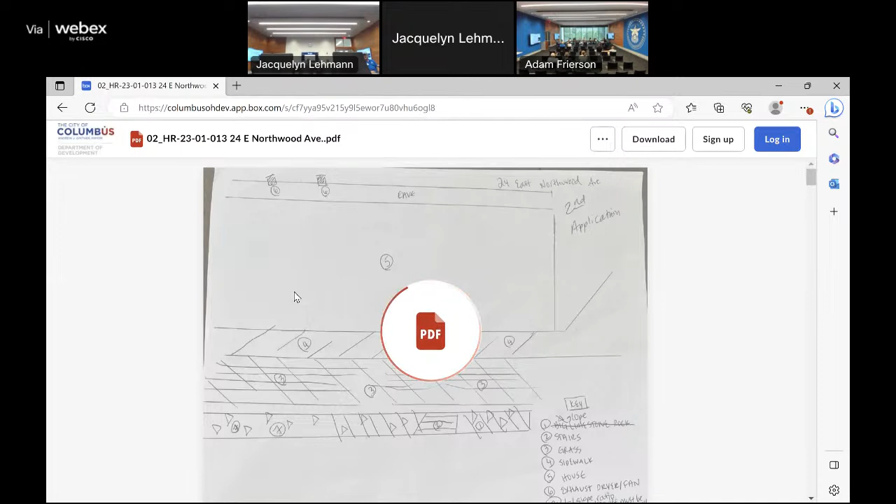Okay, so jumping in, the first application has been moved to staff approval at the business meeting. So we're going to go ahead to number two for the continued applications, and that is for 24 East Northwood Avenue. This application involves landscaping and exterior alterations, including modification of landscaping with new hardscape and removing of the retaining wall, as well as installation of venting through soffits.

And removing a portion of large rocks and installation of perennials. That work has been completed. There's also a proposal to install a new retaining wall, and that is proposed, so that work has not been completed. The property received a code violation in August of 2022 regarding the change of the front yard area to hardscape, removal of retaining wall, and modification of the roof soffit with venting extruding from the soffit.

The application was continued at the January meeting, so the applicant had time to come back with a revised proposal and drawing of proposed plantings. The applicant has added plantings and removed some of the rocks hardscape. At the July 6th business meeting, the commissioners noted that the application is moving in the right direction, but want to make sure there's enough plantings.

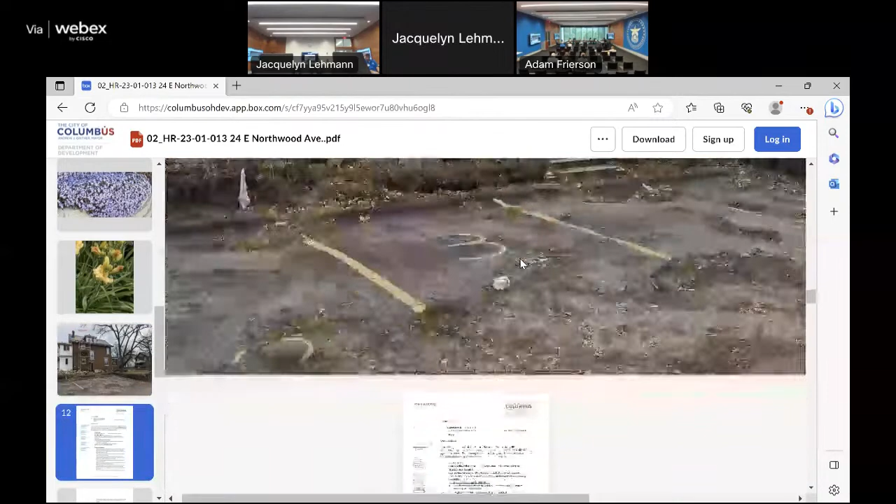The commissioners asked what would be put on top of the landscaping fabric. The commission asked if staff could include a before photo side by side with the current photo of the front lawn area to better show the difference. The commissioners noted the storage container should be removed, and the applicant has since confirmed that the storage container has been removed from the property.

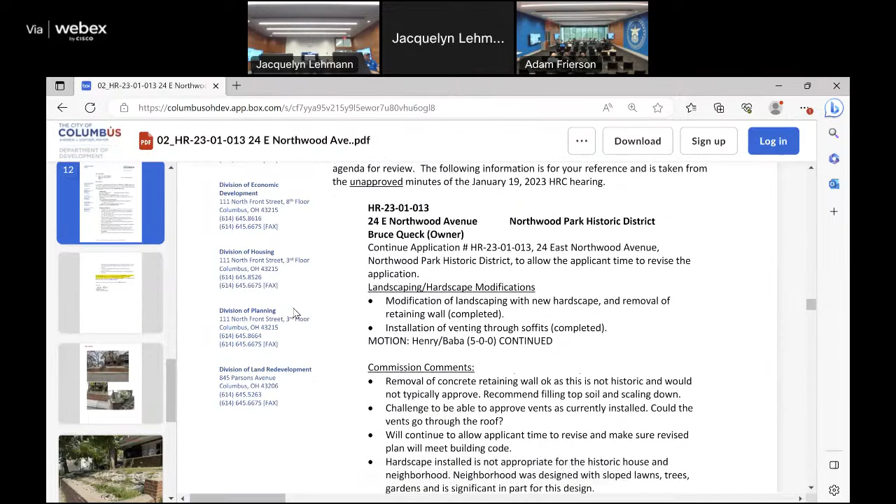The commissioners noted that new retaining walls are not typically approved, as they want to avoid setting precedent. The commission did have additional questions about the proposed retaining wall based on the sketches. They did not see details, or wanted to see details, showing long-term viability, such as for water or drainage, or weeps, and were not sure what the foundation materials were that were being proposed. The commission noted that the proposed materials appeared to contrast from the brick retaining wall currently present on the property.

And the applicant noted that on the side of the property, there was sort of that round rock, and that I believe is the cue that they were taking from.

And then the commissioners asked that the proposed retaining wall be indicated on the site plan to show the location.

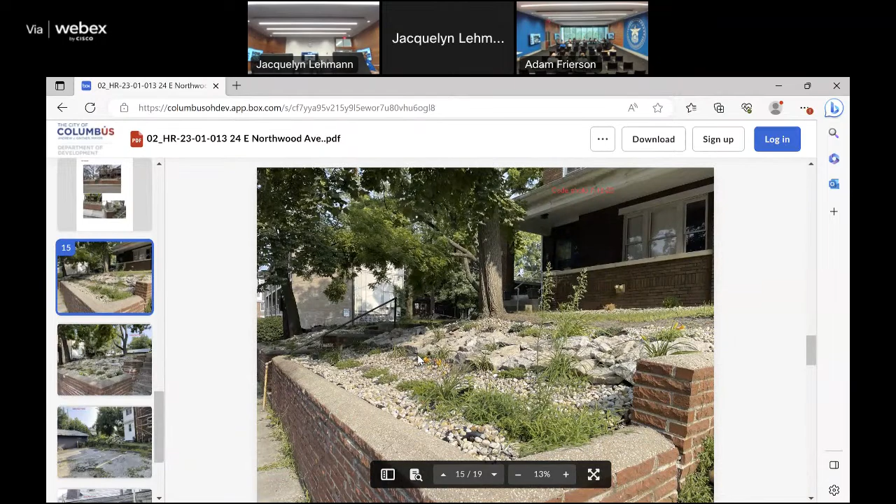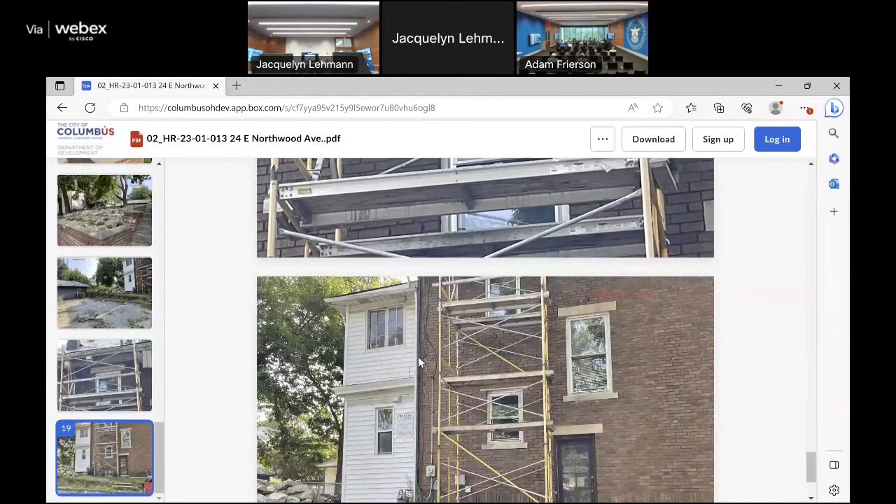So staff recommends increasing the amount of plantings and reducing the hardscape to more closely match the historic landscape of the home and the neighborhood, to meet the guidelines and code, and to confirm that with an updated landscape plan. So one suggestion would be adding plantings of various heights, which may help achieve that greenscape.

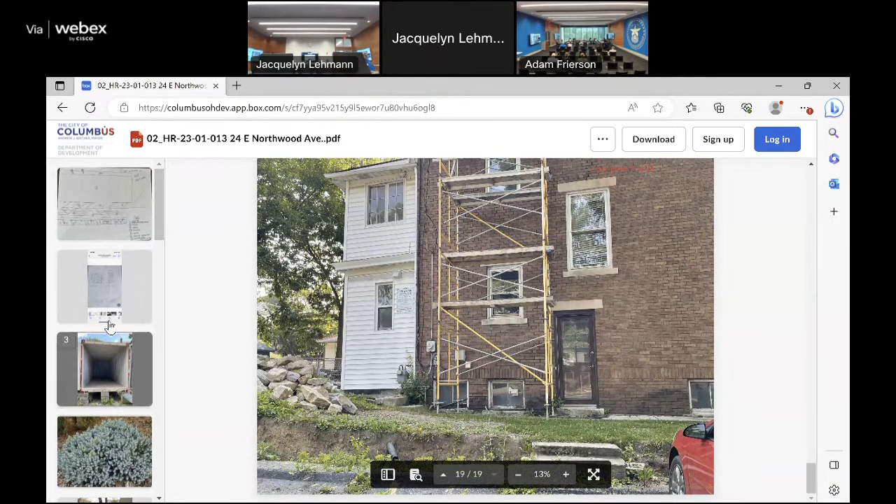The applicant notes that additional work has taken place for the venting and soffit area, so staff recommends the applicant submit current photos of the venting and soffit area to clarify the additional work that has taken place. And code enforcement has provided some updated photos from this week, just recently added to the application to give an idea of the current context.

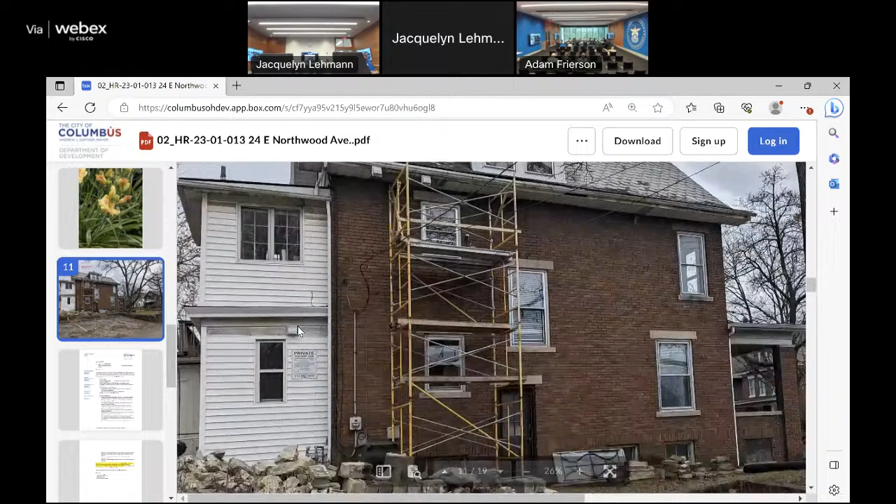Staff recommends continuing application HR-23-01-013 at 24 East Northwood Avenue to allow the applicant time to revise the application to meet city code and the Columbus Register of Historic Property architectural guidelines. The basis for that staff recommendation is city code 3116.13, standards for site improvements, specifically letter A, and the Columbus Register of Historic Properties for historical plants and landscaping on page 83.

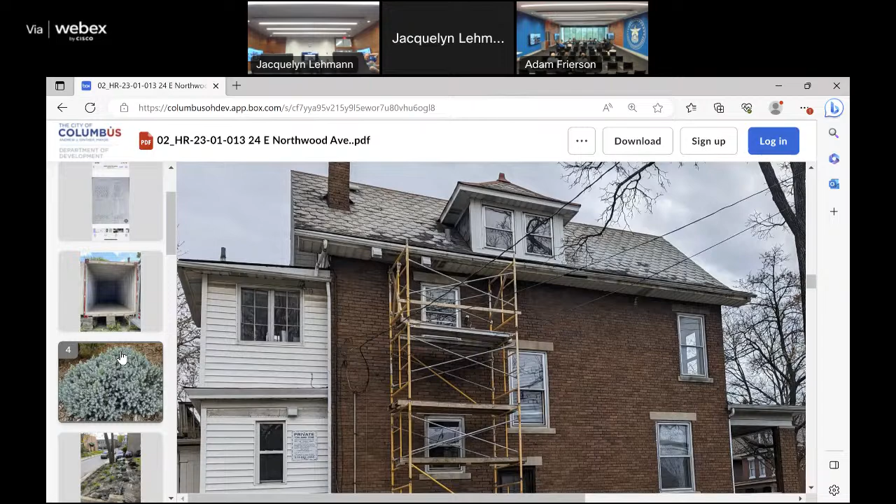We could table it if there's a possibility we come back to it if we don't have the applicant here, if that's okay with you. Yeah, why don't we do that? We'll move on to the next application, just in case they come in. Maybe that'll give us some insight.

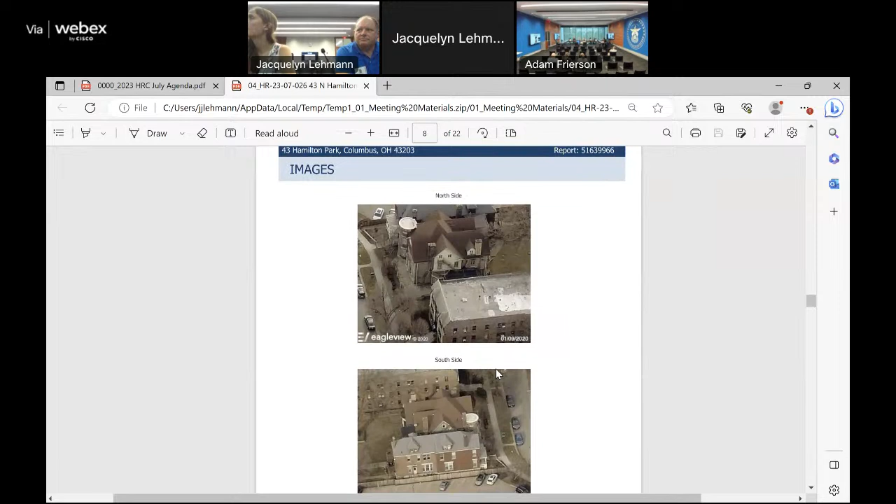So in response to commission feedback, the applicant notes that their primary reason for selecting the ultimate shingle is for increased durability, and confirms they will bring the shingle samples to the July meeting.

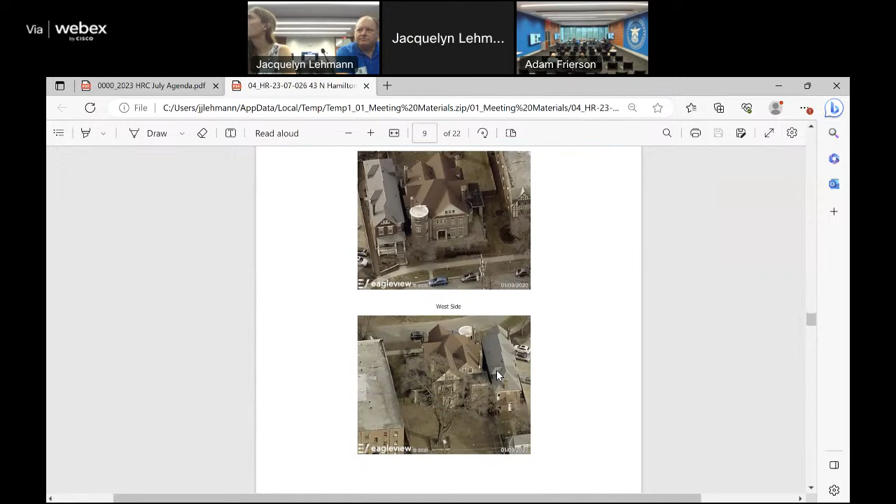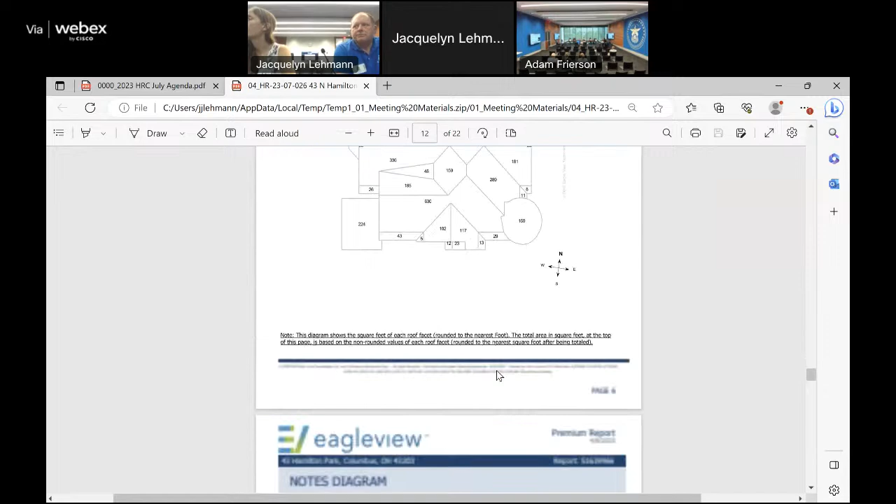Sanborn mapping from 1901 to 1961, as well as the Ohio Historic Inventory Form from the 70s, confirm that the roofing material is historically slate. That's just something staff wanted to check, since the asphalt shingles currently on the home happen to be a red shingle, confirming the roof was slate and not tile. So the proposed shingles should avoid varying sizes, but rather have uniform sizes to match the appearance of slate.

The approved shingles list itself that we have today was established based on the historic use of roofing materials in Columbus, specifically the types, colors, and shapes of slate. While no asphalt shingle exactly mimics that size, color, and texture of slate, those on the current list are the closest we have found.

So, following the city code standards for alteration, repair or replacement of missing architectural features shall be based on accurate duplications of features substantiated by historic, physical, and pictorial evidence, rather than on conjectural designs or the availability of different architectural elements from other structures.

So the question before us today is, does the proposed shingle selection match the appearance of slate similar to or better than the shingles on the approved list? If found to match, staff recommends that the proposed shingle be approved as a test case. If the shingle does not match the appearance of slate, staff recommends choosing a shingle from the approved shingles list per the standards of alteration.

So the basis for the staff recommendation are the standards for alteration, specifically numbers 6, 11, and 12, as well as the HRC guidelines for roofing materials.

Were the samples part of what you're considering using on the roofing material that you're discussing today? One quick thing, if you don't mind: you guys have put down that the shingle we are proposing is a 3-tab, and it's actually not. It's a dimensional shingle, and I don't know how that ended up being listed that way.

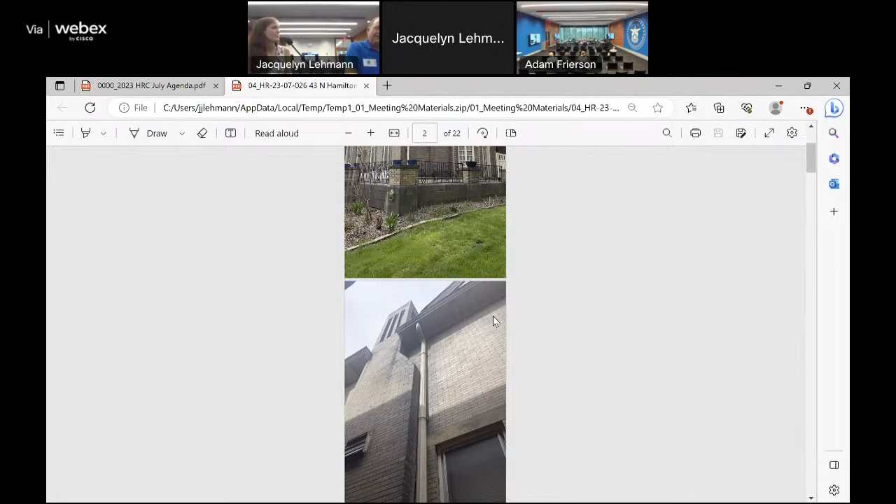Oh yeah, if it helps, I guess. So currently, the home has a castle-like feature on the left side of the building, which they actually have a person looking into creating plans to do the original cone. Wow, and so that would also be wrapped with the shingles.

Should have like a conical roof on it. Yeah, that's the way it was originally, I think. Yeah, so we have an original photo of the house back from -- I think I saw it. Okay, great, 1912. Okay, and that will have to be approved separately, right? Yeah, yes, absolutely, yes.

Yeah, so obviously you wouldn't do the same shingles on there. Yes, they have wonderful plans. Oh, there it is, yeah, and then it's the last one. Oh, that looks nice. Yeah, great.

Okay, so within the next couple of days, usually we say 3 to 5 business days, we'll get you the COA for the roofing and you're good to go.

Okay, is there anyone here by chance from... 24 East Northwood? Anybody? Is that where we started? Yes, I keep an eye on that, okay. Kimball. HR-23-07-027, 792 Kimball Place. Anybody here for Kimball? Please come on.

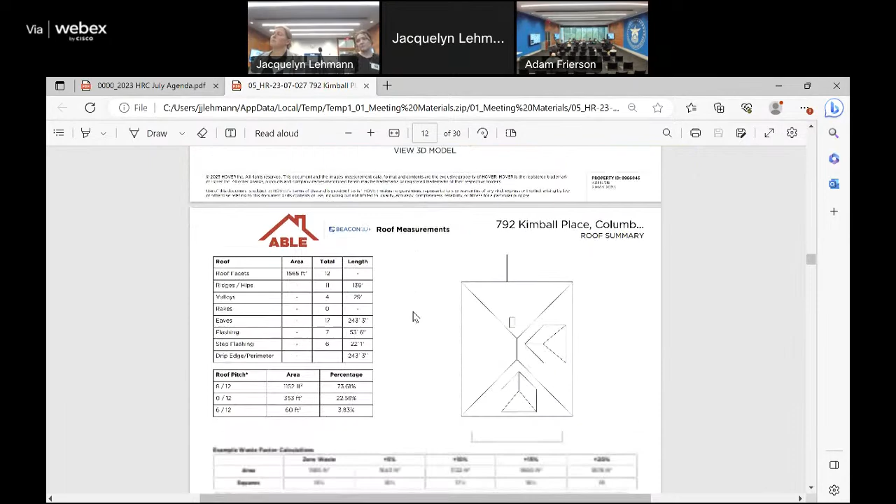For this application, the question before the commission is whether sufficient documentation has been provided to determine if the slate roofing can no longer be repaired. HPO staff does not support the installation of hat vents, rather we recommend ridge or edge vents in lieu of hat vents.

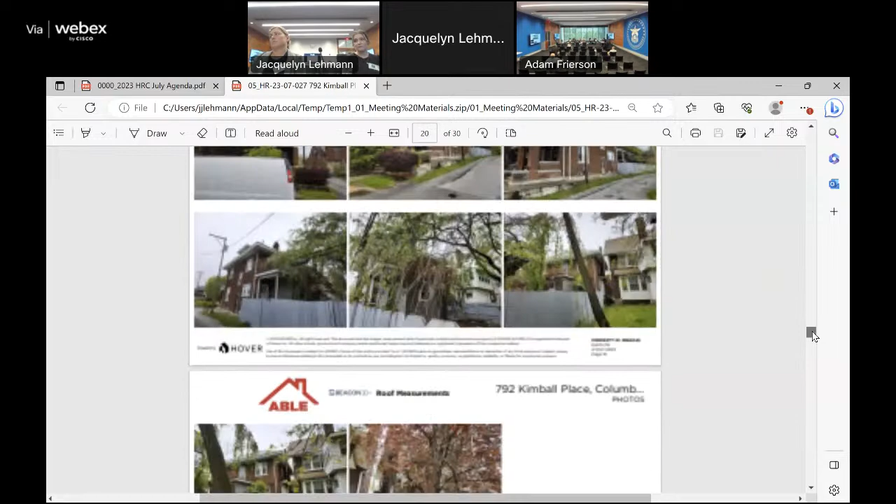Staff recommends approval of application HR-2307027 at 792 Kimball Place with the following stipulations: that clear photos and documentation is provided to confirm that the slate can no longer be repaired, and that appropriate venting is completed instead of hat vents.

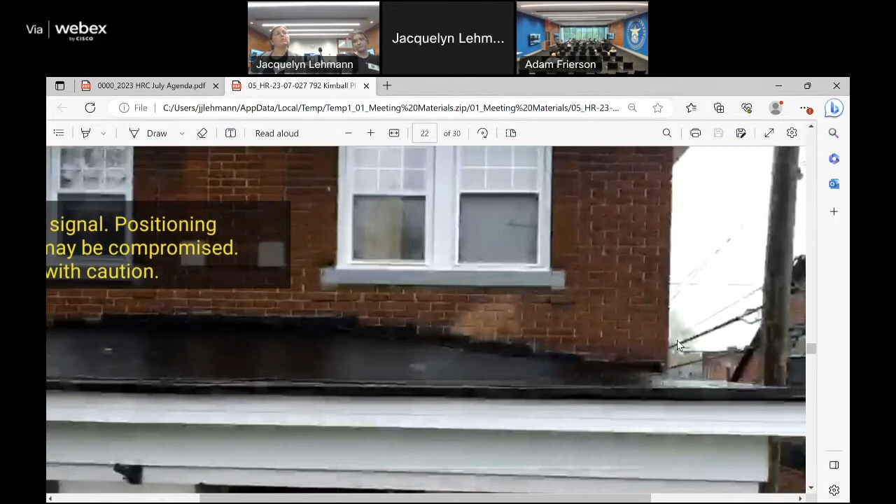The staff recommendation is based on the standards for alteration, city code 3116.11, specifically numbers 2, 5, and 6, as well as the HRC guidelines for roofing materials, which note, as an example of caption, that the new asphalt roof has a metal ridge roll vented along the ridge instead of using hat vents, and that the ridge vent material is barely visible and appears in the photo as a horizontal dark line or shadow beneath the ridge roll, as well as the amendments to the HRC guidelines, including slate roofs and for slate replacement.

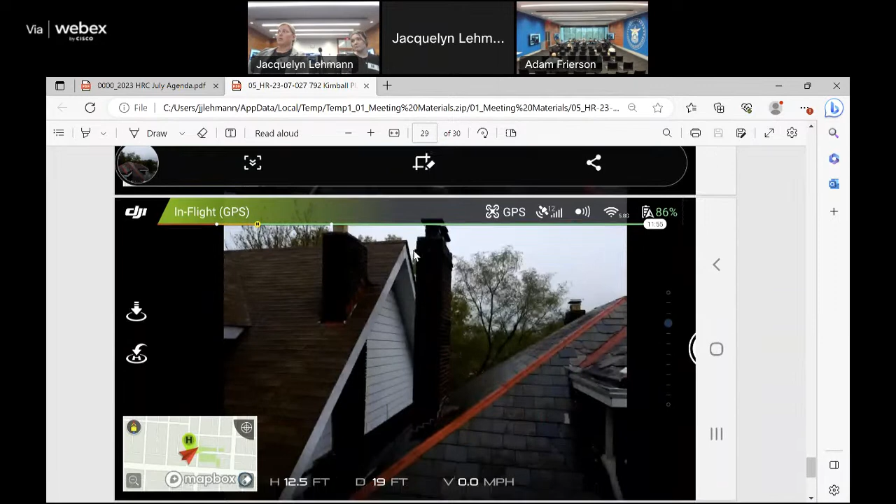I've got some documentation that I'd like to pass out, if that's okay. It's mostly the same pictures. I just thought it might be easier to see the damage if I circled it and pointed it out, as well as we can discuss the ventilation issues or concerns, I guess they should be.

Sure, okay. I labeled everything, so it should be in there. Thank you. Yeah, thanks, yeah.

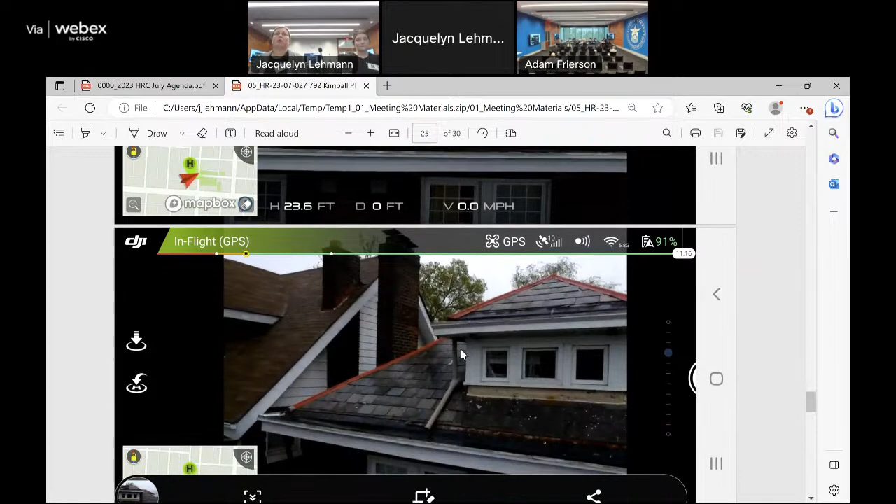Can you do spot repair - remove the damage and just put back the original material? My understanding is sometimes yes, sometimes no. Sometimes even getting on a roof that's over 100 years old will just damage it more. The Durable Slate company does repairs, but their opinion was that it was beyond its life and in need of replacement. I would just defer to that company - they're accredited with the Better Business Bureau, and I don't think they have an interest in being dishonest.

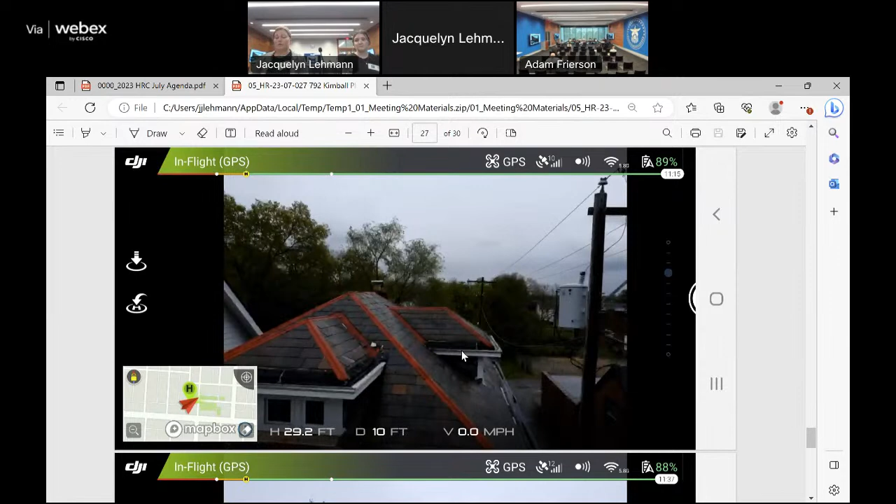Understood. Do we have documentation of their opinion, so we can reference that expert? They submitted it - yes, right at the front of the packet. Who sought out that information from the Durable Slate company? I had them come out initially to look at the roof.

It is an expert opinion, right? And I would imagine they'd provide clarity if they thought repair work was possible. I think if it was repairable, they would have probably liked to do that. Well, I'm sure they'd like my money either way.

Yeah, there's a lot there. Looks like they're not even all circular - that's a good point. It looks like about 40% damage in that shape. I hate losing the slate too.

Let's talk about the venting then. That seems kind of odd. With the amount of ridge vent on the roof, it wouldn't be adequate ventilation for her attic space. With the shingle we'd install, the 3-tab, Owens Corning recommends 37 linear feet of ridge ventilation. This house would only provide, what's my number, like 9 at the most. So we just didn't have another option besides the hat vents, in our professional opinion.

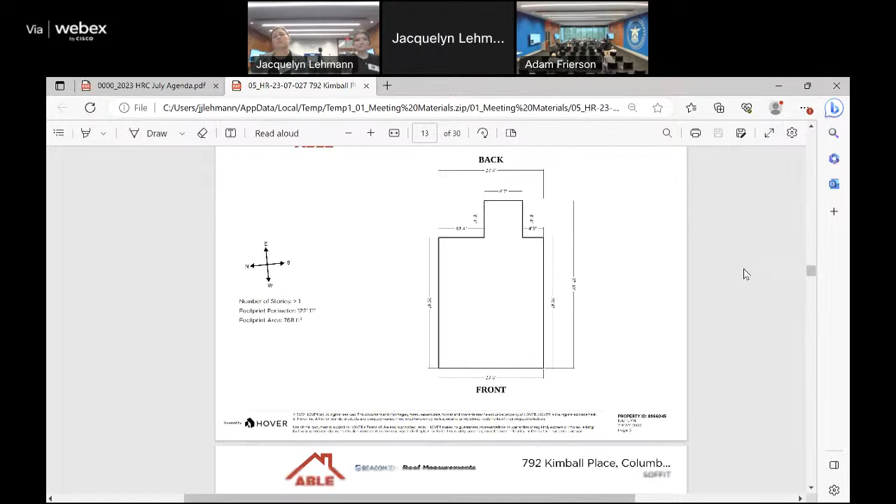How many units would you propose to satisfy your requirements? To satisfy the manufacturer's recommendations would be 9 hat vents. I believe the application needs updating - originally we thought it would only be 6. But we could alter it to add as much ridge vent as possible here, which would mean we'd only need 6 additional hat vents. I'd get the specifics on that as well.

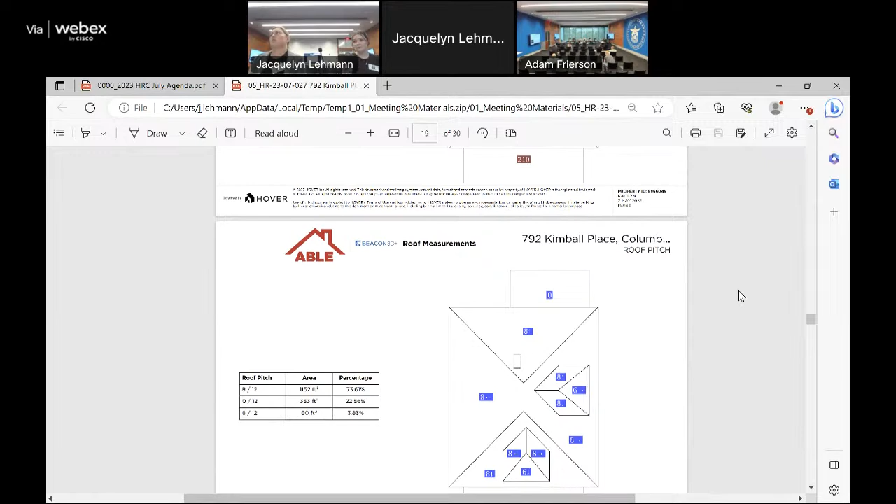So minimum of 6, maximum of 9. In the event that you were to put them, say for example, toward the rear and the adjoining property side, would that be doable, would it satisfy enough flow? Because you're talking exhaust now, especially if we do ridge vents on the dormers.

Yeah, it's not like we could put 9 hat vents on one facet of the roof and the attic be fine. It would have to be two, at least I would think, 3 and 3. Yeah.

Is there any other options, do you guys think? Well, right, I'm curious, this is a standard 4-square house. I mean, there has to be precedent, right? I'm sure this isn't the first hip roof 4-square house. I mean, I lived in one that was the exact footprint. Pretty common. Yeah, very common.

Just for what it's worth, the house that I lived in was slate and unfinished up there, and it just breathed right through. There was no need for venting, right, because it was breathing on its own. That's how it was designed.

So when you start to finish the interior, that's why I asked that question, you have a different requirement then. It poses all sorts of other challenges. I don't know if you're doing that work now or that's something that already exists, but the dew point becomes a big issue. That's challenging, converting these over.

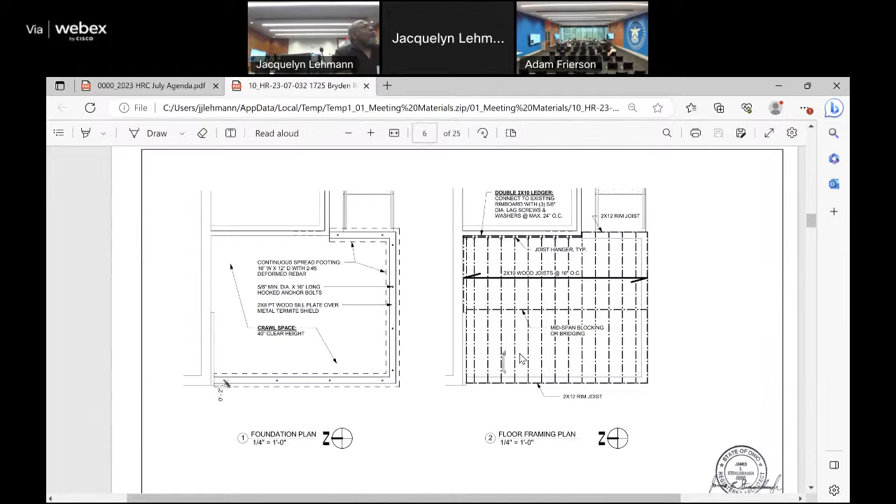For Hardie siding, for more clarification, the texture should be smooth, avoiding a full wood grain texture, which may be what the applicant is proposing, but staff want to make that clarification point. Staff also recommends the water table be masonry, to better match the masonry water table of the main house.

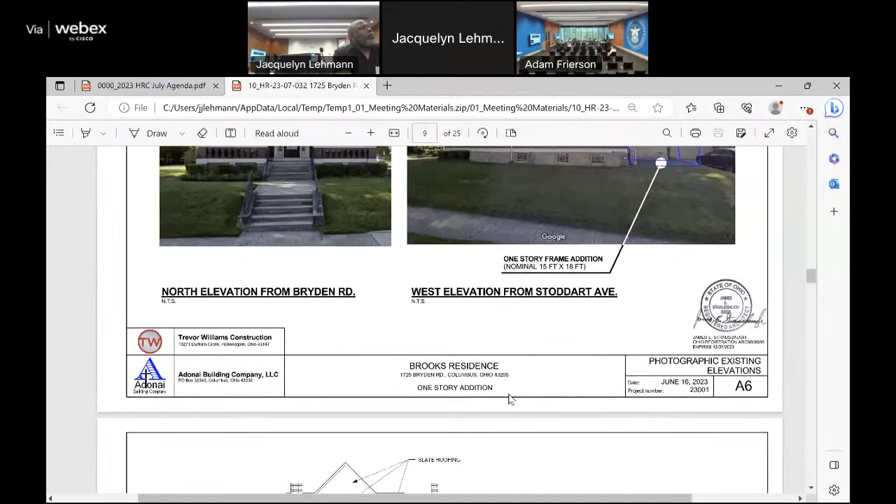At the July business meeting, the commissioners noted that although the variance had already been mistakenly approved without an HRC recommendation, the commission will need to provide a recommendation. The commissioners also noted that for a proposal of this scale, being a new addition, the application will need to be discussed at the regular hearing.

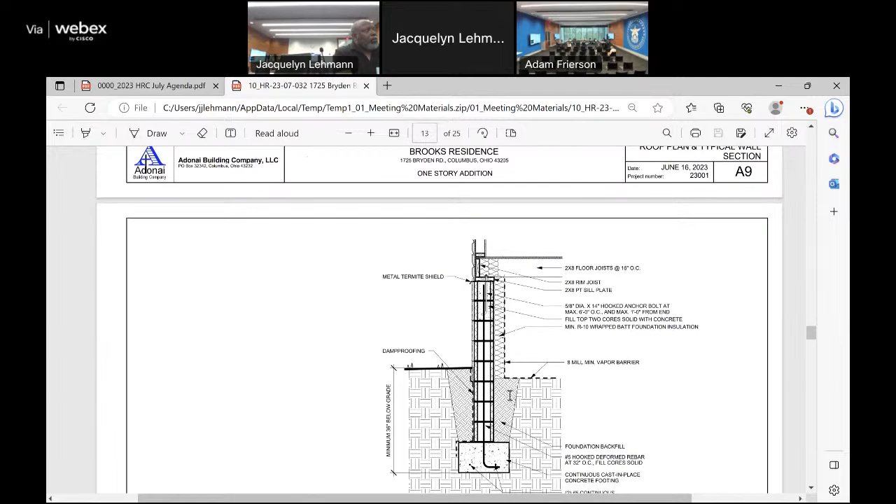The basis for the staff recommendation is the HRC guidelines, including for new construction, design considerations for foundation and siding, as well as the amendments to the HRC guidelines for required specifications for approval of artificial siding, and City Code 3116.12 standards for new construction generally, and City Code 3116.11 standards for alteration, specifically numbers 3, 10, 11, and 12.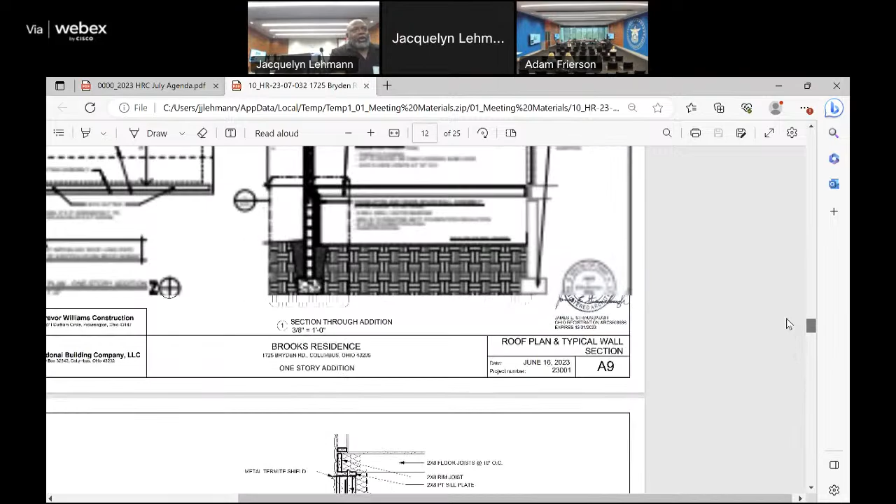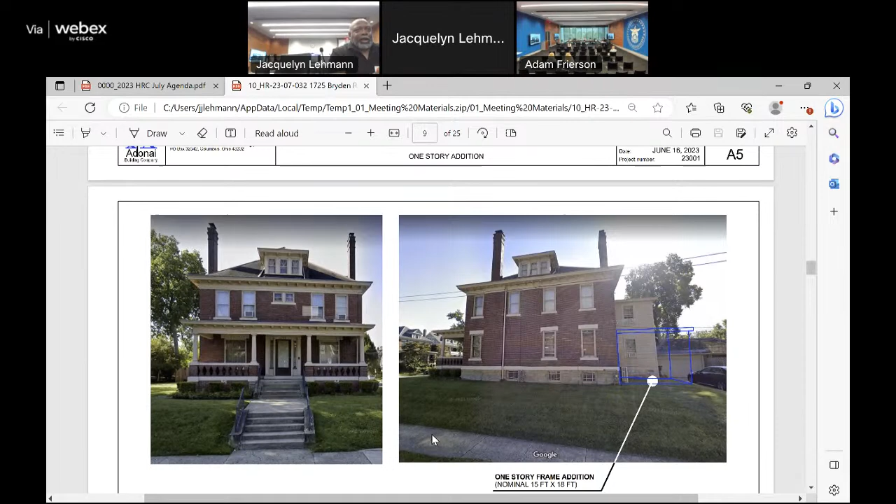Okay, what would you like to add, sir? In brief, this was a little bit confusing because we've already gone through a process of getting a zoning variance approved, about a month and a half to two months ago. I thought I was at this very meeting, and then when I went to the commission meeting a couple weeks ago, they brought up that I was here for a zoning variance, and I was confused. Evidently the left hand didn't know what the right hand was doing, but we have an official approval of a variance already.

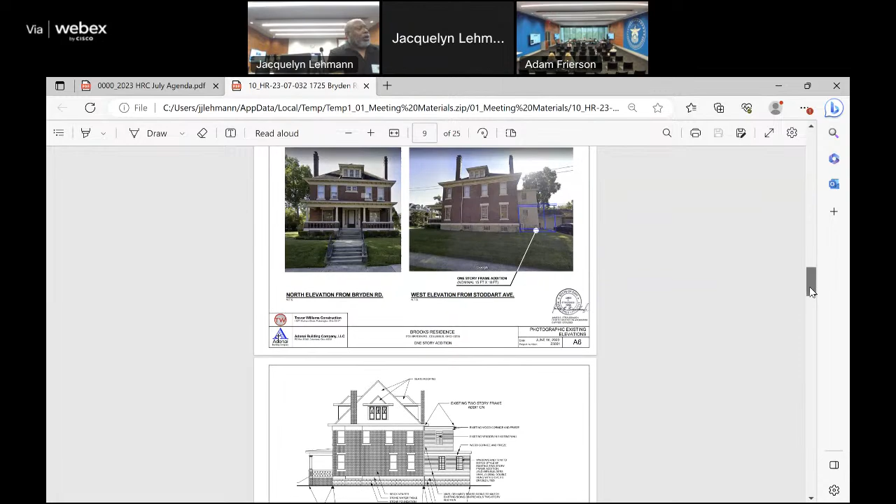Good, did you bring us a copy for the file? I didn't bring a copy because it's already been submitted. I didn't know that. Yeah, that's not going to be a problem, we'll figure that out. I just didn't know if you had it handy. I probably have it in my folder here. Okay, keep going. Yeah, I didn't know that was something you were even asking for.

I do. So we submitted for a building permit, and it's on hold until we got a letter from the HRC, from what I was to understand. I'm not an architect, but I've been working with my architect. I am the person on record dealing with this whole project. I'm a contractor.

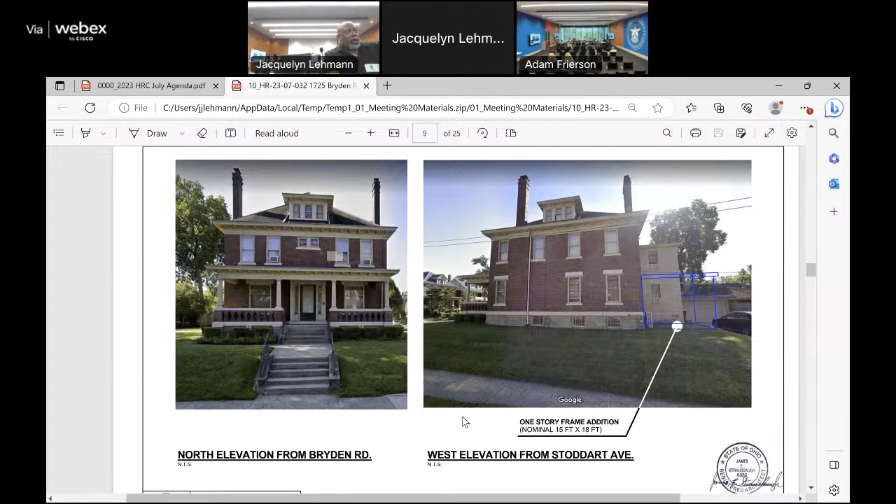But from what my understanding is, really the only thing you guys were concerned with mostly was the windows, and I guess the siding too, but we were matching the existing siding, and for the windows, we were using a window from the actual approved list.

So we have maybe 3 windows that are in question, just the 1-story addition in that rear corner. The staff noted that the window listed on the application isn't correct. It appears the architect made a correction with a letter but didn't change it on the drawings. You're okay with that? Yeah, I can make sure that happens.

And you're okay doing the foundation in masonry as recommended, to the water table? Yes, absolutely. So I think we're ready to go. If we approve it as submitted, that would also give him the recommendation for the variance, and even though he's already got it, he'll just check that box off. That way you won't run into problems later where somebody says you never got that, because you'll have it. They mentioned in the last meeting that it would be done.

If I could clarify, is the 'as submitted' version with the right windows from the approved list, or are there stipulations? Has the application been updated with the windows and everything? We just need the drawings to be updated. Like the gentleman mentions, there's a letter stating they'll be using a window from the approved windows list, and they specify which window — the drawings just need to match that statement.

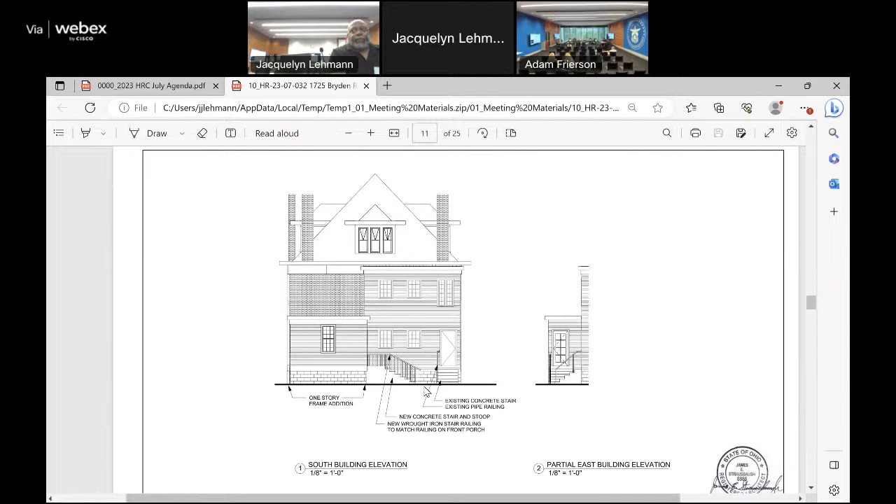Okay, so we could just move to staff approval. If the applicant is okay with the siding texture being smooth and the water table being masonry, that should also be reflected in the drawings. Would it be better to move this to staff approval, or should we make a motion? Since they're already at the hearing, I think we could approve it with the condition that materials be submitted to staff.

For case HR 2307-032, 1725 Bryden Road, I make a motion to approve the case and provide the recommendation, with the stipulation that the staff's mentioned items be reflected in a fresh set of drawings and application documents submitted to staff. I'll second it. Any further discussion?

If you get a list of the details, I'm sure we can put that in for you — probably in writing, about 48 hours from now. I know how it goes. Okay, but you're okay with all that? Yeah, I'm fine with that.

How soon do I get the actual letters? You can provide the updated drawings anytime, but if we don't get them before we send a letter out, we'll typically send a letter within 3 to 5 business days confirming it was approved. Final materials will still need to be submitted for the certificate of appropriateness, and once we get those, we'll issue that certificate and send it by email.

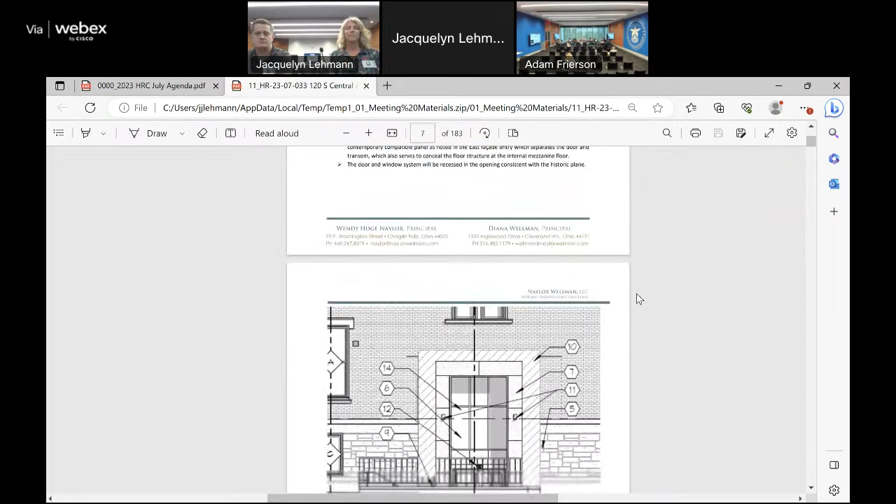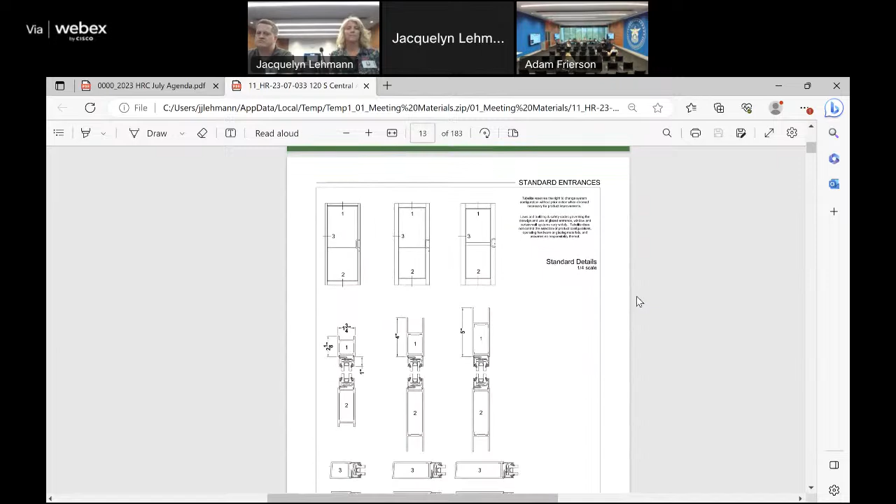For 120 South Central Avenue, the proposal is for demolition of a 1955 single-story addition, as well as exterior alterations, including installation of a new door surround with a 3-panel cement board, blond brick, limestone, and aluminum storefront, installation of a concrete ramp and retaining wall at the east elevation, replacing the existing multi-light vinyl windows with the Quaker H650 series window from the approved windows list to match, replacement of all doors with new aluminum doors, replacement of the roofing including the asphalt shingles and flat roofing with EPDM roofing in white, replacing the gutters and downspouts to match existing with the finish to match the trim color, repointing and masonry cleaning, limited masonry replacement and patching, installation of light fixtures and security cameras via mortar joints, and repainting the cornice.

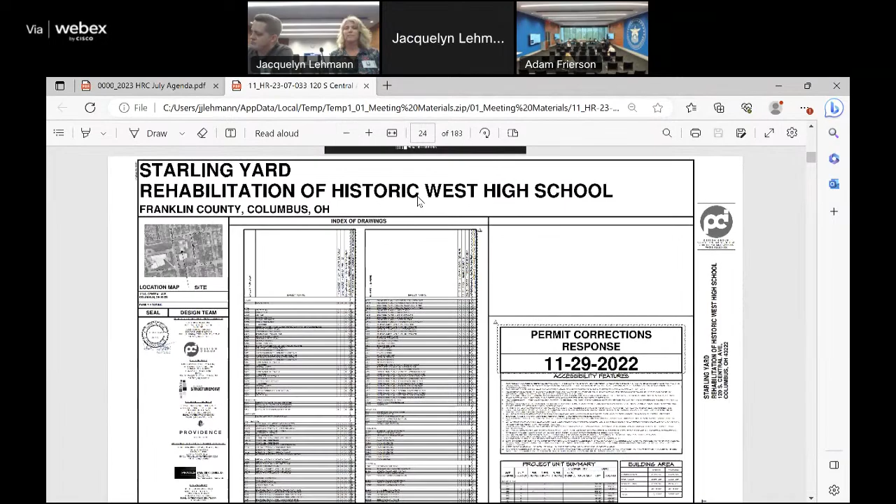At the July business meeting, the commissioners noted that a complete application has been submitted, and due to the scale of the proposal, it will need to be reviewed at the full hearing meeting. In response to previous commission feedback from when the application was withdrawn, the applicant has submitted updated materials, including product spec information and an example image of the proposed aluminum doors, and noted that the new windows will be multi-light. So the questions before the commission today are: are the proposed aluminum doors appropriate? Are the proposed ADA ramp designs for the east and south elevations appropriate? And does the commission consider the 1950s addition to be contributing, and is demolition of that portion appropriate?

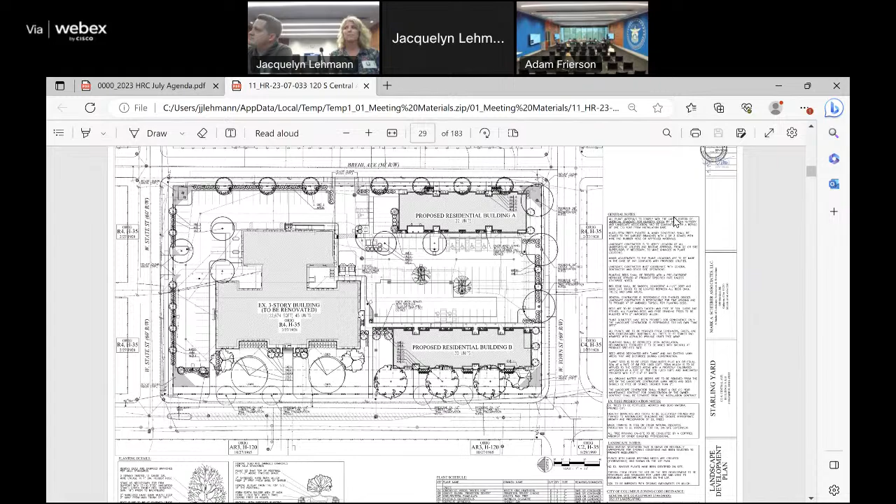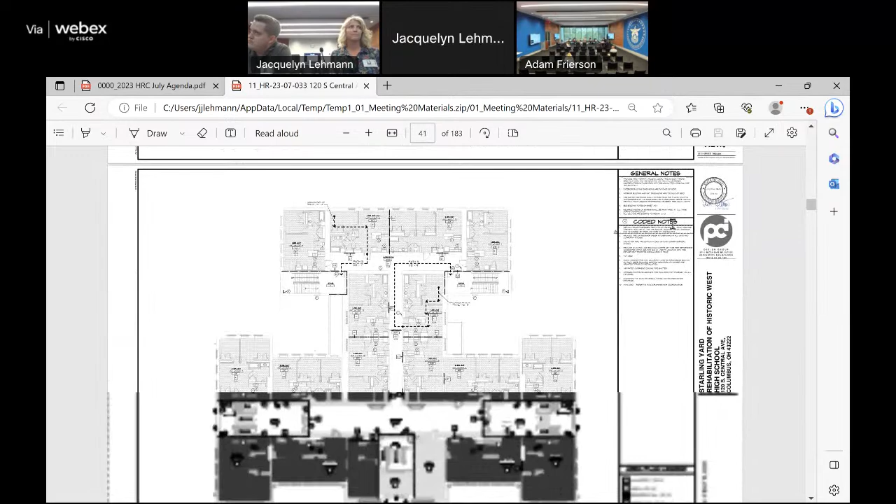Staff notes that SHPO has conditioned approval on submission of a revised design for the south entrance at the 1908 section of the building. Any design revisions will also require review by the Historic Resources Commission, as will any new construction. Staff recommends approval of application HR-23-07-033, 120 South Central Avenue, with the following stipulations: that the applicant consider using wood or smooth fiberglass doors, or match the historic door design to more closely reflect the original documented door design, and that any revised design of the south entrance of the 1908 section be submitted for commission review prior to any work. The basis for the staff recommendation is City Code 3116.11 standards for alteration, specifically numbers 1, 3, 4, 6, 10, and 12, and the HRC guidelines regarding doors, as well as the amendments to the guidelines regarding door replacement.

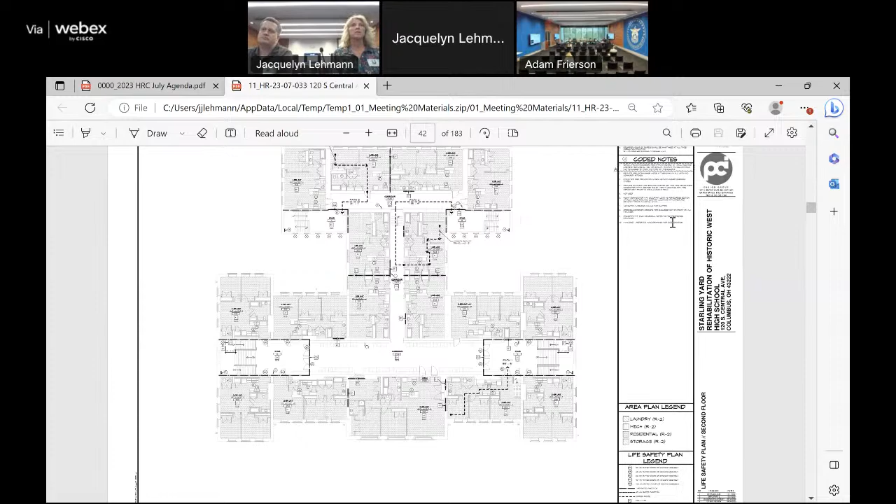Okay, where would you like to begin? In regards to the condition from SHPO, the National Park Service, that was submitted to the National Park Service as an amendment, and the drawings you see are what has been approved by the National Park Service. You should have received a side-by-side of historic images and the drawings showing that the doors match the configuration of all historic doors on the building.

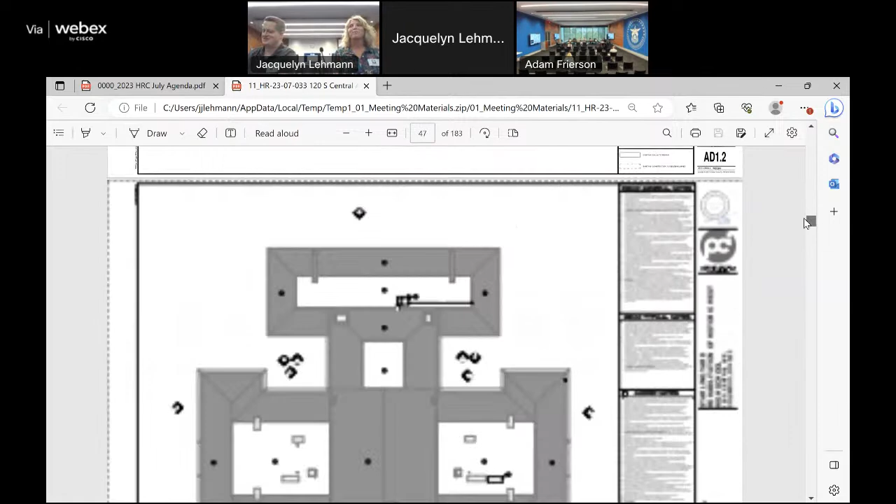Do we have this? It's 183 pages, might be at the end. That's not even loading. Oh, there it goes. Yeah, that's it, did catch it. Nice work. Yeah, mine's taking a little time too. Okay, that's a...

So all the doors and windows currently in the building are non-historic, right. Originally, the panel that you see pointed out will remain, that's the historic panel that's remaining. So the only thing changing below the transom and the panel is the double red doors to a panel door to match what you're seeing in that historic image, so it's just sliding. There's a storm window we're going to get rid of, but the original transom will remain. It's just that the detail isn't drawn there, but it's intended to stay, yes. That was a concern, making sure they're not eliminating that transom top.

Looks good. The 120 on there, does it have to be that big? The 120 of the address, yeah. I'm sure it can be adjusted.

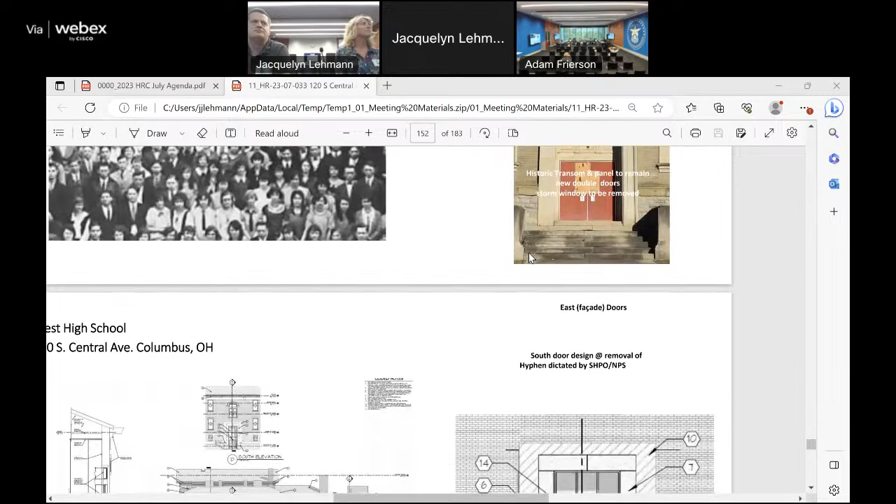I just asked because it looks like there's, oh, the dashes and everything there, but I just wanted to clarify that. I was looking at a picture where there's not—there was another photo below, I think, that had—is that another set of doors where they were open? In the historic image? Yeah, I think so. I believe that's right. It was up there a minute ago. It's the other direction. We can go—it's only two or three frames.

There it is. Yeah, here you can see they're out. See it? Oh, okay. There you go. There we go. Just in the nick of time.

Okay, somebody wanna put a motion for HR 23-07, 033-120 South Central Avenue, move to approve the application as submitted.

A second. Do we want the condition of the doors? Do I have the condition for beefing up the door, wider framing? What about mine? You don't want to talk about that? Sure, you're not okay with it? Well, I guess just for the applicant's sake, maybe some more specificity would be helpful from us about whether we're trying to match more closely the existing detail.

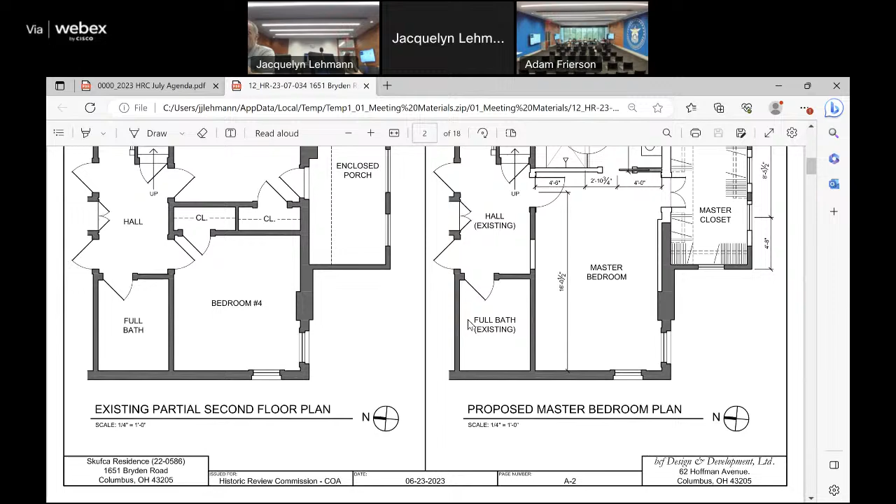For the rear second-story porch, to replace the paneling with siding to match the gable, replacing the existing vinyl windows with aluminum clad from the approved windows list, realigning the windows with 2-window configuration from 3, with new window trim to match the gable window trim, to replace the attic windows with egress aluminum clad windows from the approved windows list, and to construct a new dormer at the west side of the roof to mimic the existing east elevation dormer. The new dormer would have aluminum clad windows from the approved windows list as well.

So staff recommends in general that the new brick wall be differentiated from the historic portion of the brick wall, such as material, pattern, or other differentiation. Based on the neighboring homes with similar rear porches and the current second-story windows of 1651 being vinyl, the existing second-story porch window sizes appear to have been modified, so staff is supportive of the proposed modifications.

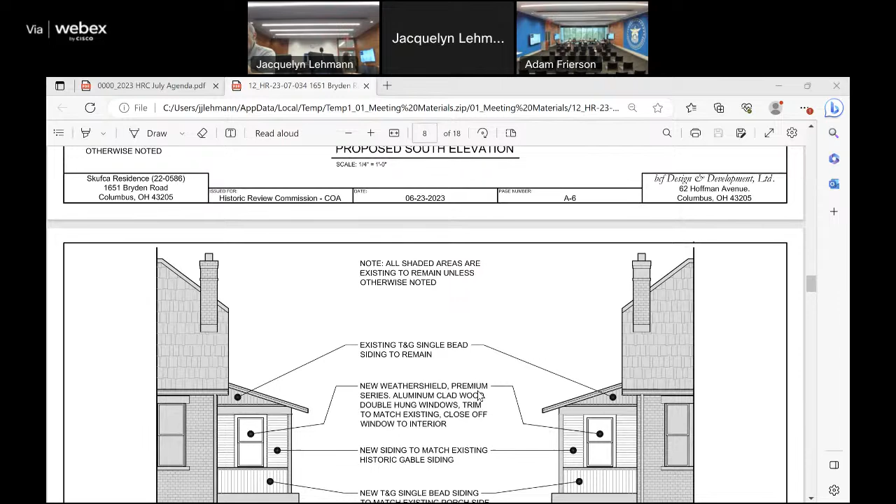At the July business meeting, the commissioners noted that moving the back door and the changes in window sizes will remain a point of discussion at the hearing. The commission noted that the design of the rear door does look closer to the existing condition, and appreciates the added details from the last application.

So in response to the commission's feedback from May conceptual review, the applicant has submitted revised drawings. The extension has been modified to show the proposed brick wall on the east side of the porch, utilizing the salvaged brick from the wall on the west side.

Staff recommends approval of application HR-23-07-034 at 1651 Bryden Road, with the stipulation that the proposed new brick wall be differentiated from the historic brick wall in some shape or form. Those recommendations are based on the HRC guidelines for porches and stoops, new construction, design considerations, as well as City Code 3116.11 standards for alteration, specifically numbers 1, 2, 3, 5, 10, and 12.

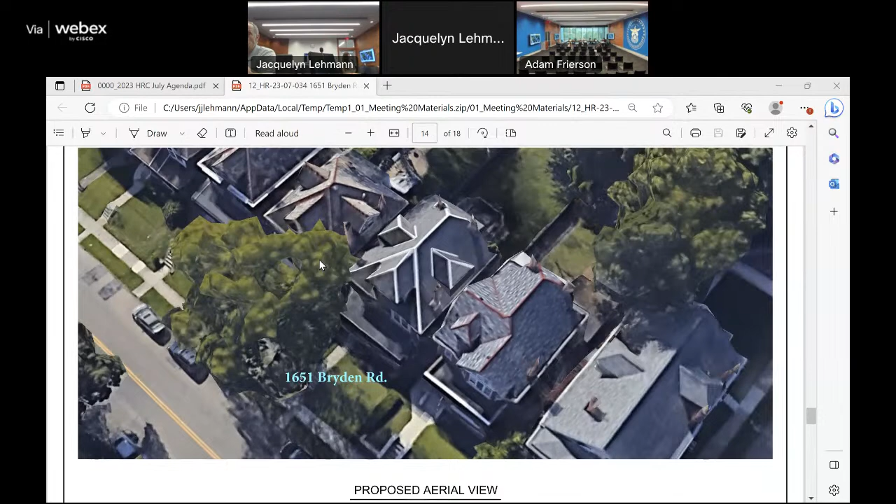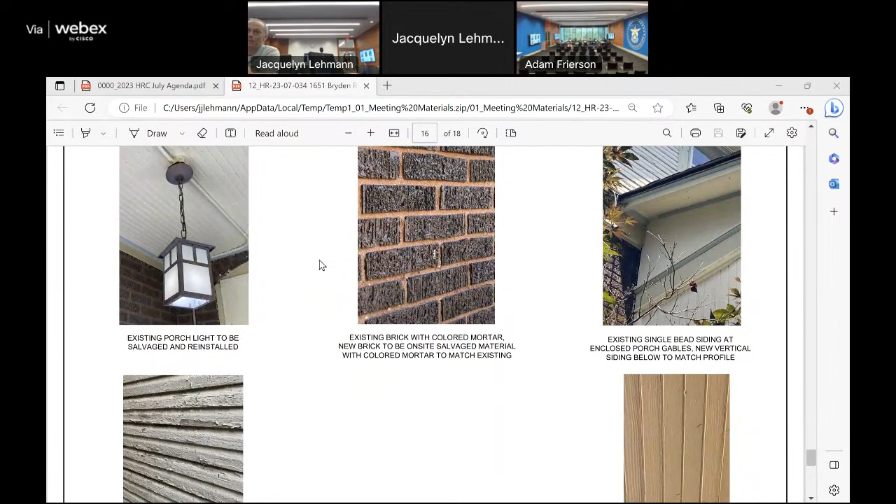Okay, what would you like to add? I think she's pretty thorough. I guess I'm open to how you would like us to differentiate. We added the brick in because the initial submittal didn't have brick, and there was question about removing brick.

I know that in the last business meeting it was brought up that this is actually more of a very small addition to the back of the house as opposed to a modification, because we're adding space in, so we'll have to add foundation and that square footage. It's only 16 square feet or so, but it's still an addition coming underneath that old porch roof.

So the owner is very flexible - if you want him to do something different, he's fine, he just needs the square footage for the interior of the floor plan. So the idea, if we're okay with bumping it out, we'll make it look like whatever you want. There's wood siding in other locations on the building, on the upper floors and stuff.

Right, so our first submittal was very, very conceptual, and we had kind of photoshopped a wood siding thing, so we could do it out of wood siding. We could potentially do just a pier.

I need a column at the corner, because the old column's gone, if you look at our pictures. The current column isn't actually structurally attached, it's just wedged in there, sitting on the deck. You can see it in that picture there, how it's weathered. It's never been painted. So we could do a brick column there.

I need a column there. I don't need any other structure. So can't you just hide a 6x6, or how big are you gonna go? How much are you gonna carry the load of that corner? Yeah, like a 4x4 will do it.

It doesn't have to be freestanding. It can be a freestanding column because my addition does not go out to the end. So I can do it however you want. Did you want that as an architectural element though? Is that what the plan was, or did you just stop and decide?

When we came for the first conceptual review, it was brought up that there was a concern about removing brick. So we thought, well, we have brick, we could put it back in. But we don't have to do that. It's obviously going to be harder to salvage brick to reuse it than it is to use a different material, so we would be totally fine doing a wood column there and wood siding on the two walls that are created.

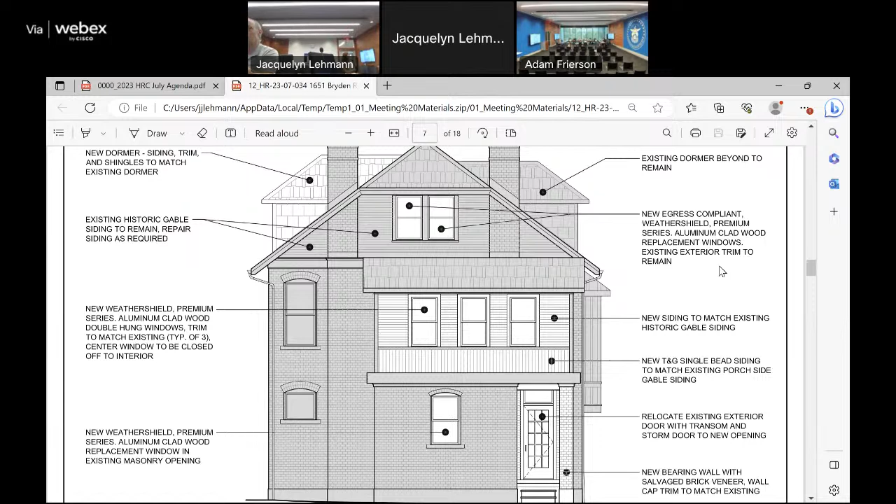So the wall with the door is pretty much just the door. There's a returning wall approximately 4 feet that comes in, but it doesn't come into the corner, it's inside of the corner, so it would tuck in underneath the existing porch. Put the first page of 18 up there, the floor plan. Yeah, you're tucked back in. So I can do it however you want.

So it doesn't have to be brick. I'm perfectly fine doing whatever you've got. So where's the freestanding column that you mentioned? The freestanding column would exist at the outside edge of that brick, so I can't lose that corner. I have to have a column there, but I don't have to have a wall there. But can't the column be inside the wall? Or it can just be a freestanding column.

Where do you want brick? No brick, no brick, no brick. Okay, I'm fine. Brick. Well then we have a differentiation between new and old, right? We're perfectly fine about trying to put other things that make it look old. So we would be using the siding that matches the siding on the gable? Yeah, because we're already using it on the upper story above it. Exactly, and it gets you everything you need.

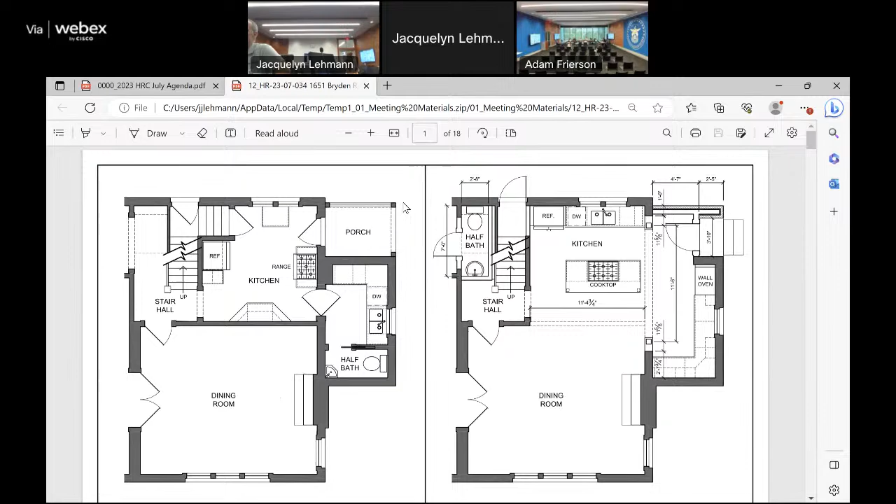What about these egress windows on the third floor? They're going to replace something that exists. I think I read that somewhere. So they're on the gable ends of the third floor. If you look at the front, it's not even a window anymore, it's like a cabinet door. So are you altering the openings?

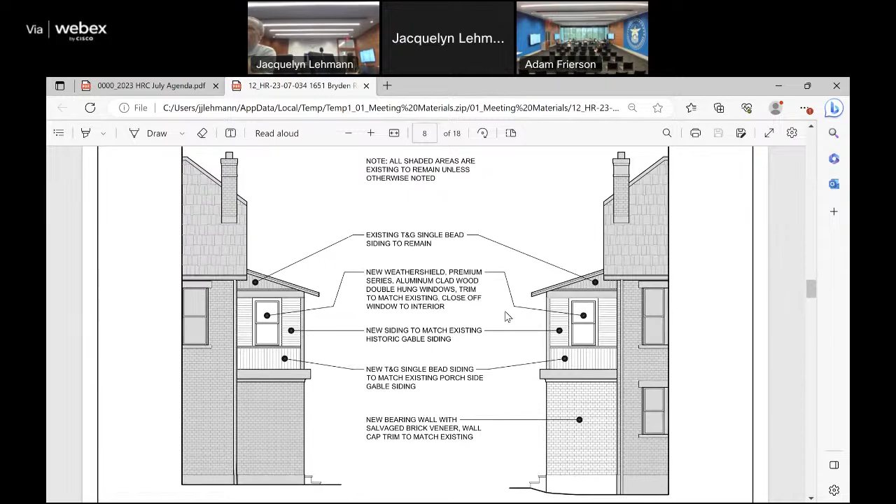No, but I need to make egress, I need to meet egress. I got you. So because it's a bedroom, when I switch the window, the building code will make it have to be egress. I may or may not be able to do it out of a double hung, it may have to be a casement. We can mimic the mullion configuration in the window, but I haven't gotten that far into the design. But there's no change to the existing opening sizes, so the opening sizes are going to dictate what I can and can't do.

I'm not positive I've got the height, I think I have the width, but I don't know that I have the height in the double hung. So that's why it was noted as, it has to be egress. And the matching gable, we've done that, we've approved those many times, so not an issue. I think we're ready.

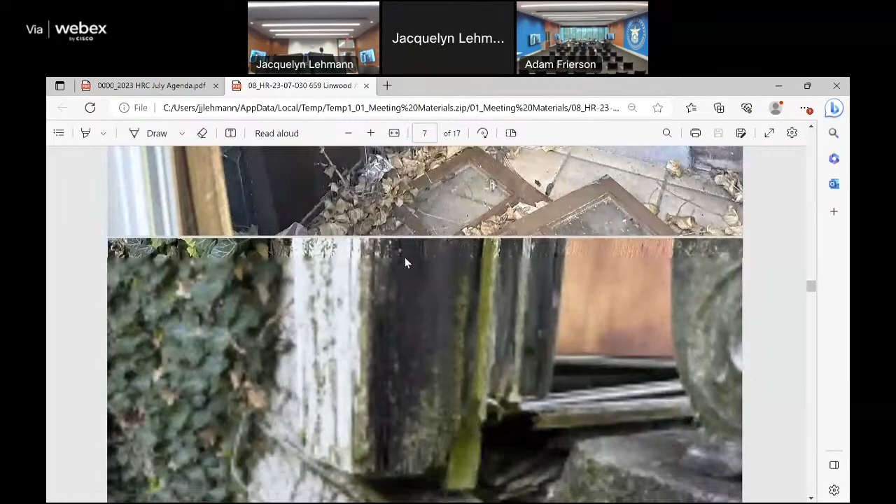Okay, good. He did supply - I had asked him to show a picture of the inside, and that brick wall and window, I think, is a really good indication that it was enclosed. Has he submitted what the new porch is gonna look like? There's a kind of conceptual drawing that has been submitted. Oh, there it is. Okay, I'm okay with it.

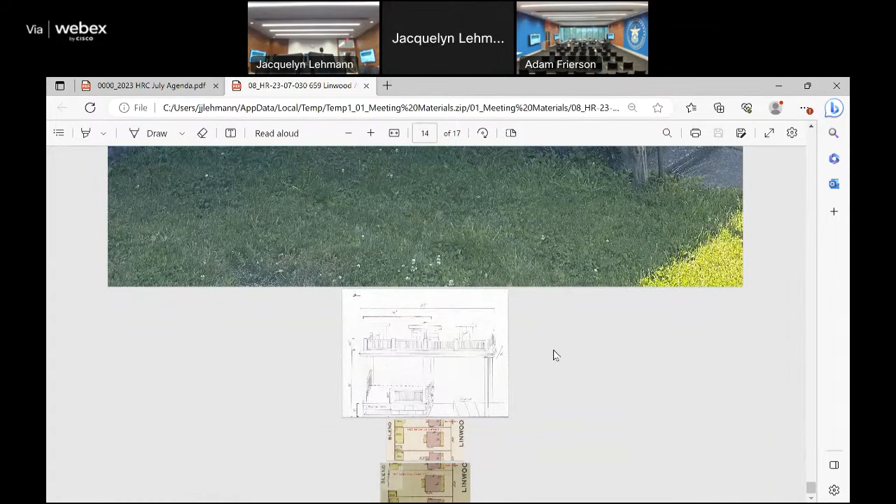Not that good for drawing, but yes. They'll probably need to come back for the proposed construction, but if there's any feedback on the conceptual drawing, provide that, and then I know they were looking for a vote for the demolition.

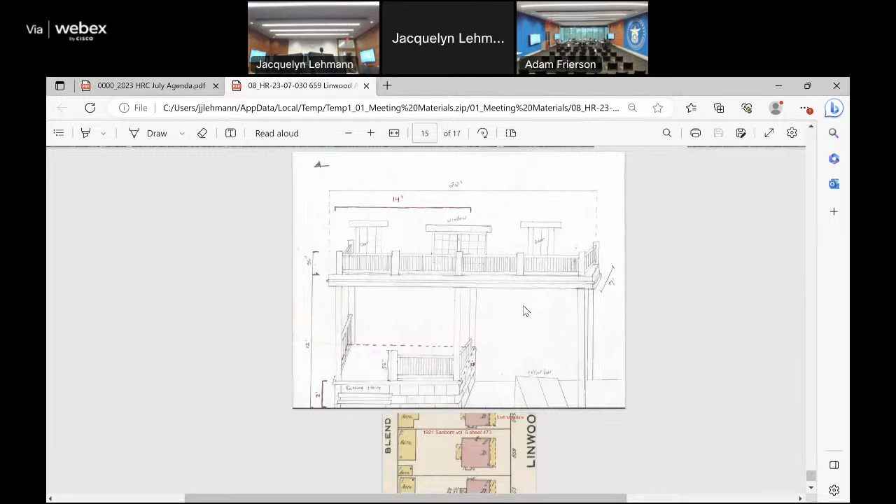Well, I don't know, the posts look a little spindly. I mean, I can't tell. How wide is that? Maybe it's gotta be 30 feet, 22 feet. There it is. But if we approve the demolition, he'll still have to come back with the final drawing of what he's going to replace it with. So this is conceptually what he's gonna replace it with.

So I think it depends on whether the commission would consider the existing porch historic or not. If it's historic, then our code says that we need a definite plan for reuse and confirmed drawings. But it seems like it might not be historic, but depending on how the commission feels about that, it might be okay for demolition, or it might not be. It's certainly old, but it's not.

I think you're right. I think that window indicates that was an open space. I think the upper deck, though, was always there because...

Those are walkout windows upstairs, right? Or doors or something upstairs. I think there's a door on the second story. So I think the existing door opening was there. Is there some? Yeah, big.

I think it was the way he's proposing it, that there was an upper deck to walk out on, but it wasn't enclosed underneath, 'cause that looks like infill, right? Yeah. Is that what we're looking at, that octagon window? Yeah, the octagon window was the first clue that doesn't seem right.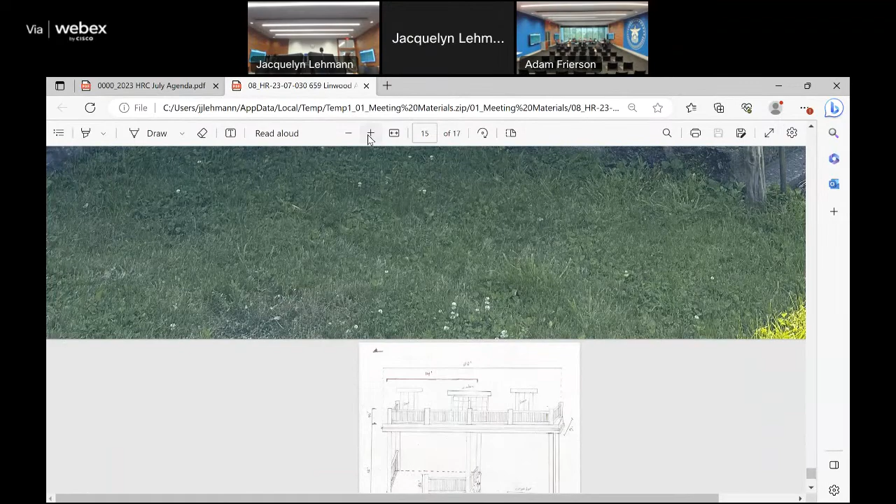So, is it true that we have to be in agreement about the conceptual or whatever replacement before we approve demolition? Yeah, for historic demolition - I think it's in the preservation demolition code - there should be a definite plan. That's what we're saying.

So is this enough for us to say this is a definite plan? Or is it too sketchy? It's pretty sketchy, pretty sketchy.

I think conceptually I'm there, but I wonder about this: are we taking specific cues from the existing dimensions? We're saying elements of that porch are historic, so should that all be documented more accurately on a scaled drawing, an actual elevation? Then when we look at the new one, we can compare it with what's there.

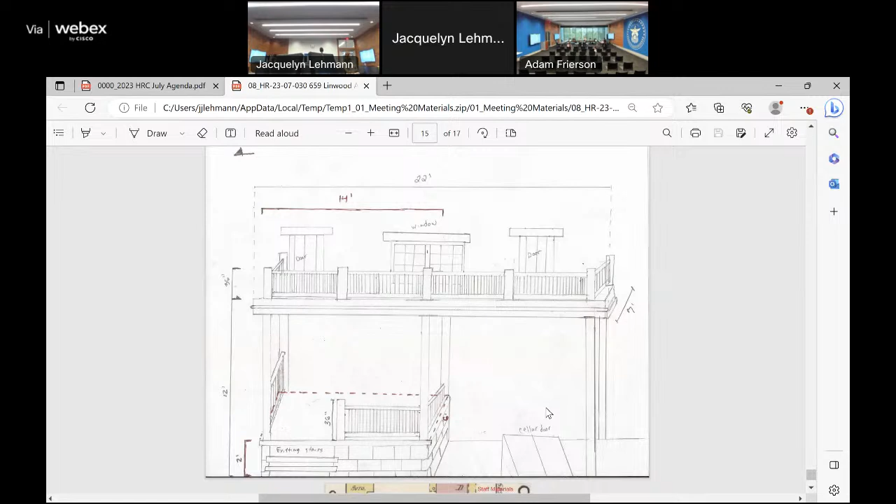I agree with you, and those proportions of that railing and stuff should be identical in the new drawing. We're probably not there yet with the sketch, and if it gets demoed, then it's like... it's not.

But if they can provide that kind of documentation with the measurements and stuff to the staff, I don't know if they need to come back. I think we can do this as a staff conditional approval, if they make a real drawing for us to look at.

As long as he replaces it in kind, in the sense of the look and the footprint, I wouldn't have a problem approving the demolition, but that's conditional. It's obviously there, pretty poor condition. Another month isn't gonna hurt, I don't think.

It could only be two weeks if he actually comes back with a real drawing. So everybody's okay with it? Yep. Well, let's call it A and B - demolition is A, but are we gonna do demolition before we get the drawing? We're gonna do a conditional based on the drawings, I think that's what we're saying.

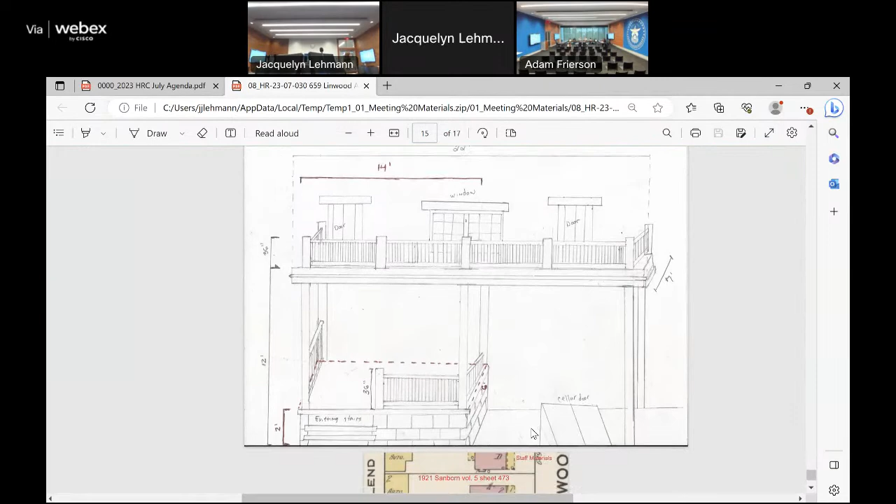And to your point, you made a really good point that the lower section is stepped in and the porch is stepped out. It would be nice to know that margin to carry through to the next design. Even though it's just a band board and all that, it's still a nice proportion. I think when you see it drawn up, you're gonna see it's a nice proportion on it.

Yeah, we're losing all the detail in that. But he's close, he's got it over here next to the window, which is how it is existing. We don't see hand-drawn perspectives too often. It's not bad, but we're used to Clyde's drawings. Good drawings.

We'll do it. Anyway, who wants to make that into a motion? I can give a shot for HR 2307-030, 659 Linwood Avenue. We're gonna break that into part A. So for part A, regarding the demolition, we're moving to do staff approval pending a detailed elevation drawing of all historic elements, specifically everything up on the upper story down to the structural elements supporting that story, excluding the infill portions of wall on the first floor. Second.

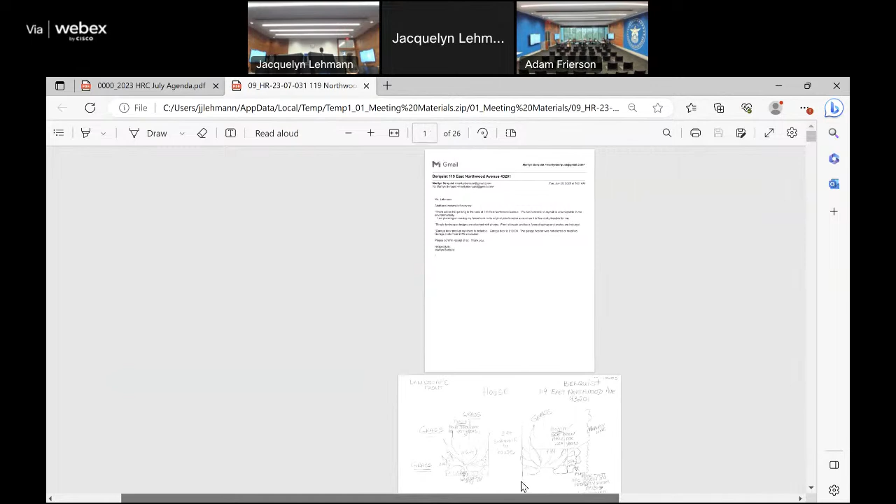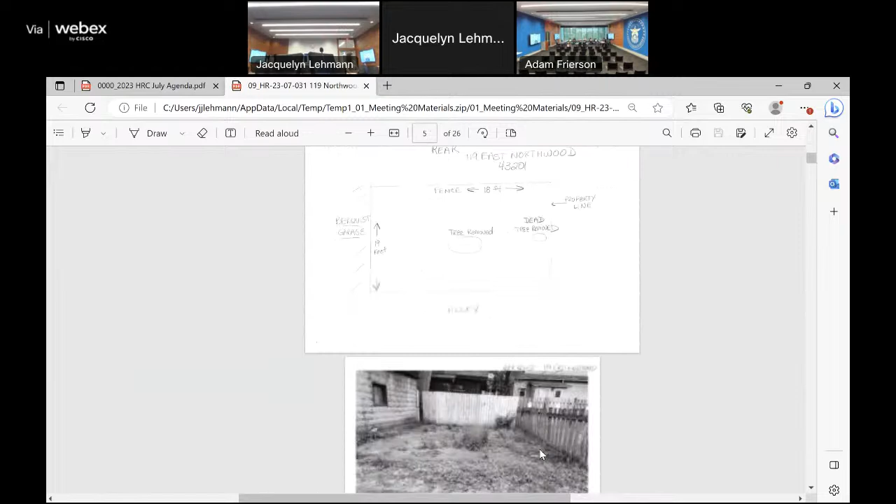Followed with some staff report notes, the applicant, in response to business meeting feedback, here's the version here, they have submitted some notated maps from the county auditor's, just for the alley side in regard to the garage doors. Because he wanted to put in a single garage door, is that correct? Yes, and that has been installed already.

And it looked like it was right up against the alley. That's right there. Well, yeah, what was the dimension of the alley though? Just so we know, yeah, that's what we asked for, the turning radius, just because we've asked everybody else for it. Two birds, right? I mean, I don't even think there was an apron there. No, but who knows, they all be super wide. So I think it is.

Yeah, so the other question, of course, was the fence height. So the applicant has confirmed that the fence height is 6 feet and that the garage doors that were removed slid sideways, so they were that barn door style. And the county auditor map indicates that the width of the alley is 15 feet, and the location of the dumpster from the apartments is behind the garage. Okay, so 15 feet, so that's 7 feet, isn't it? Yeah, we're fine.

It's because of the tight turning radius and how close it is there. And I assume it's always asking for the dimensions, so I didn't want to assume.

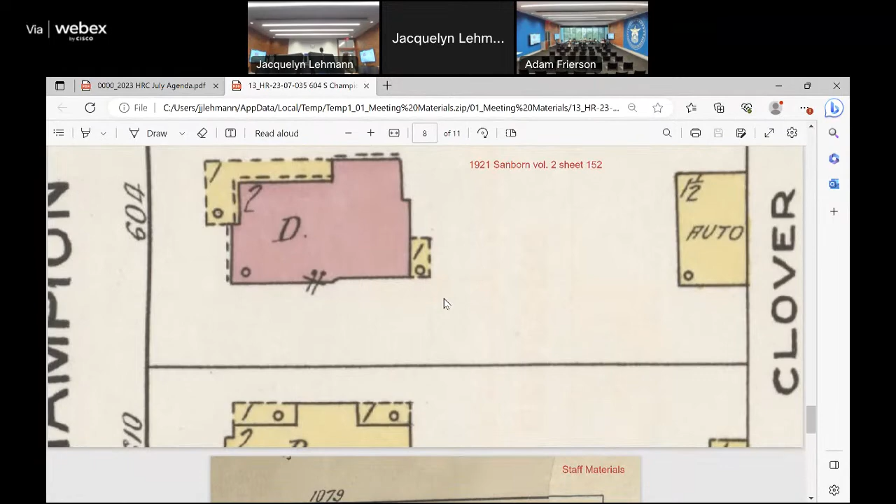So they should be within what zoning is recommended. Good. Did you receive the new drawings that reflect that or not yet? Sort of, I may have put them at the top for these materials. Let's scroll back up there. They kind of have a little notation. So I think this is the most recent drawing, either this or the second page.

And this is the typical garage that we've approved. It has the wood trim on the sides and everything. Framed in corners, right? Yeah, looks like those shingles.

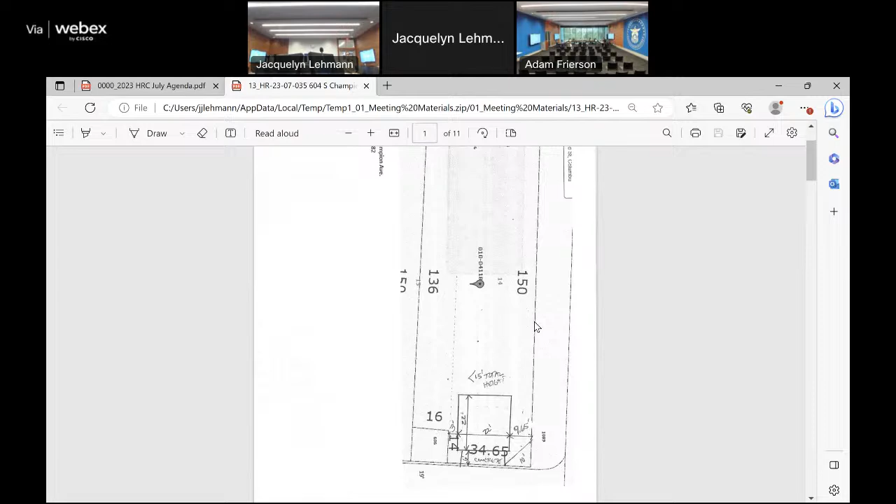So the only recommendations from staff are that a door cut sheet be submitted for final review and approval, so we can make sure it's not a faux wood grain - the style in general that they're showing looks okay. And then a foundation course is visible right now, at least in the drawings. It looks like the siding is coming all the way down to the ground, which might create some water issues and also be a little bit different in appearance than other garages that are typically approved.

And then the vehicle door might be centered on the east elevation - it just wasn't clear, so that's just another stipulation. Are you okay with us going for those details and then they submit to staff, or would you rather just continue it? No, I am comfortable with that being submitted to staff, and then if it's something the applicant is not amenable to, we can let them know they can come back if they'd like to.

I'm here for it. What do you guys think? Great, okay. For HR 2307-035, 604 South Champion Avenue, making a motion to approve as-is, including staff stipulations.

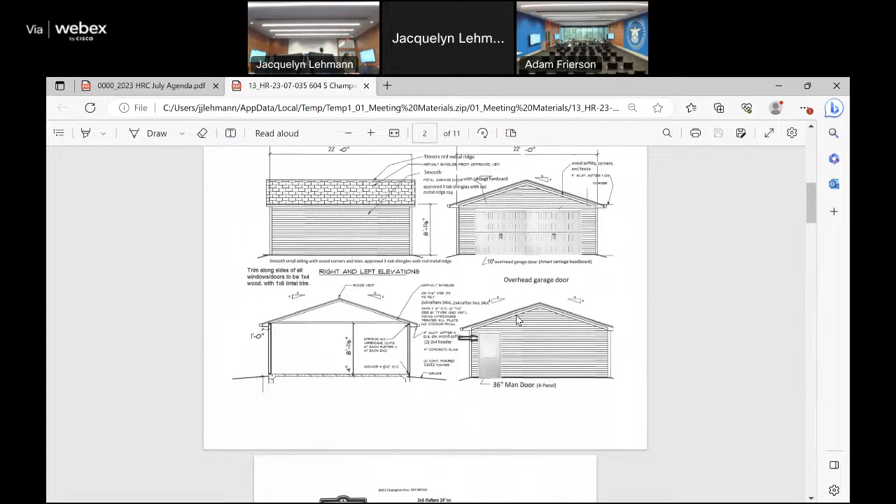And those can go directly to the staff and the plan doesn't come back to us? Yeah, it does. Second. Any further discussion? I do have a question on one of the pages.

There's an arrow that says 30-year asphalt. I don't know, unless they're dimensional, they're usually not 30-year or 25. I don't think they do that in 3-tab, do they? I don't know, is the shingle from our approved list here? They do say they're using the Owens Corning slate grade 3-tab, which is from our approved shingles list. I'm not sure about the 30-year.

Yeah, it just seemed like it was - oh yeah, it says right on the bottom. Okay. Approved 3-tab shingle with red ridge.

I would say if they had, when they're altering the drawings, to put exactly what they're going to put on the drawing for the shingles - some of these details. And if there's hardware, obviously for staff approval: hardware, lighting, doors.

All in favor? Aye. And I think that might be all of the applications. Any old business? No old business. Any new business? No new business.

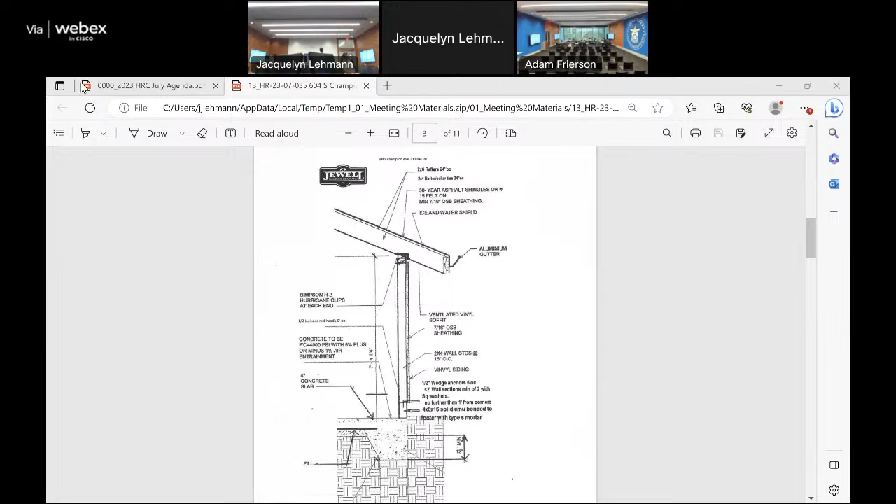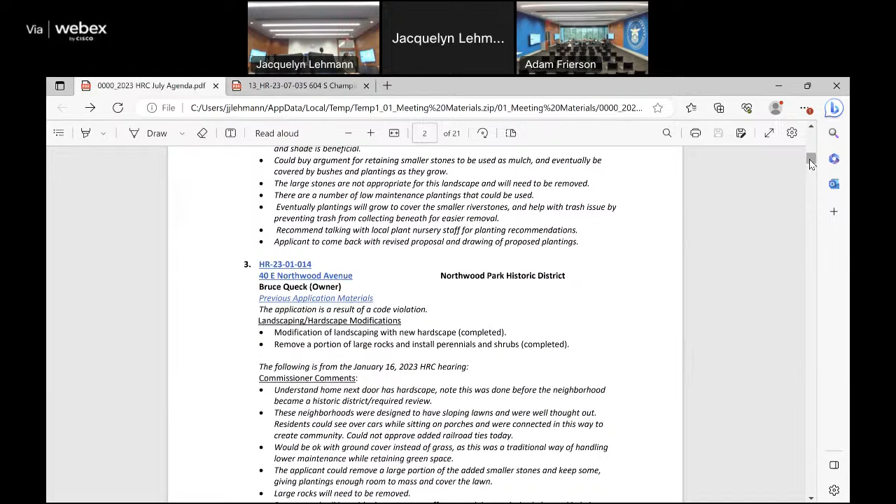Right, okay, motion to adjourn. Second. Aye. Okay, call for the vote.